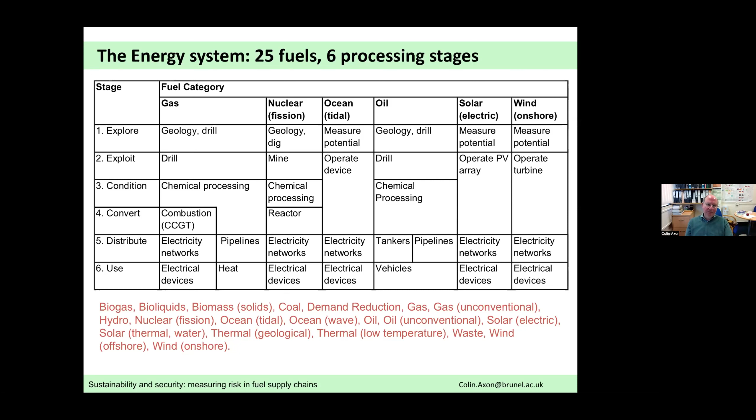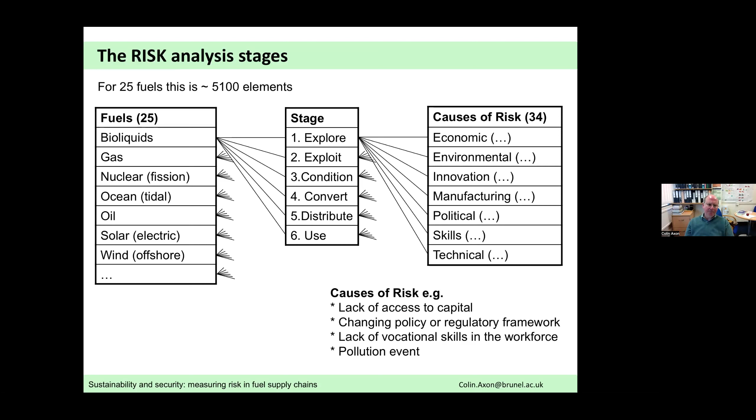So we got 25 fuels in total, each of which have 6 stages, and we identified 34 causes of risk in 7 categories that reflect the whole of the fuel supply chain. That's a big analysis exercise. I'll show you the risk in detail a bit later. We do a standard risk matrix approach using data and knowledge from various sources to assess the likelihood and impact of each of the risks. The numbers in here don't matter. These are just some examples.

What I'd like you to observe, though, is that the seemingly, quote, good renewable sources are not free from high-level risks, although there are lots of low-level risks, and the fossil fuels and nuclear are not solely high-level risks. They have plenty of low-level risks as well.

And this sort of peels back and reveals a set of information which perhaps can be used by policymakers, investors, to target interventions more wisely, or to get more bang for the investment buck or the research buck, rather than having blanket interventions which will work only in parts and be wasted in others. So the point is that the fossils have more high-level risks than the renewables, but it is a mixed picture, and we think that is important to understand.

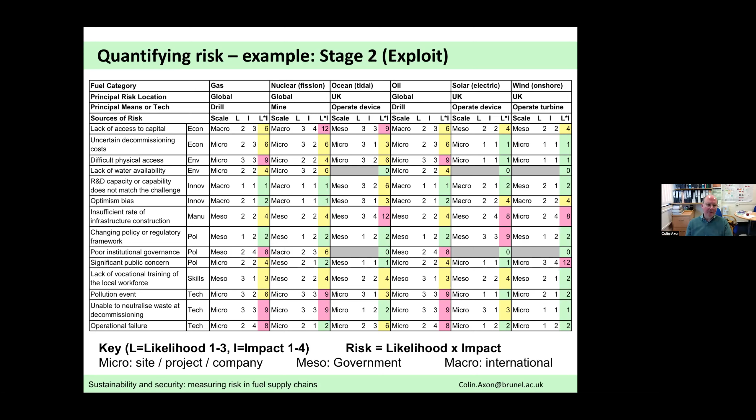So if you do all of the analysis and bring it all together, it won't come as any surprise. I've normalized the risk scores here, and they're not weighted for resource availability, and I'll come back to that. It's not altogether surprising that unconventional gas, shale gas, is at the top. In fact, gas and oil, that is predictable.

Nuclear fission, that's perhaps predictable that it's near the top. However, in terms of risk, it is near the top for different reasons from oil and gas. What might be surprising, and I emphasize this is for the UK, geothermal energy is also very high risk, carries a lot of risk, huge amount of investment essentially, and you drill lots of wells, and you spend an awful lot of money, and you may not get a return on that. The thermal store may simply not be big enough. So there are lots of risks. So that's perhaps surprisingly high.

What is surprisingly high, but entirely justifiable, are the bioenergy routes. So whether that's solid, gas or liquid. And that is, I mean, it's a surprise to a lot of bioenergy researchers, but the fuel sources that are being used, anything from agricultural waste to forestry waste to energy crops perhaps, the variability of the fuel source is really wide. And that makes processing more difficult, more expensive. There might be extra stages.

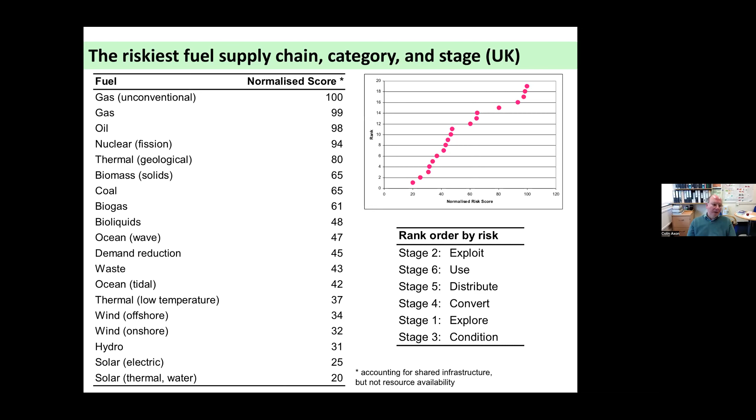These are the causes of risk. We've used a sustainability process analysis type approach to derive these. And then these were evaluated at each stage for each fuel. They have scores. These are in rank order. So most risky at the top, least risky at the bottom. Remember, this is for the UK.

What you'll observe from this is that we contend that our method of analysis is fair and unbiased and reasonable, because you can see that the different categories of risk are spread throughout, from top to bottom. They're well spread, and all of these 7 categories are represented in the top 10 most significant risks. So we think we've got a robust method here.

We tried this out with a workshop with some industry experts, only one academic, and there were people who represented consumer groups as well as generators, investors, and so on. And we asked them not to do any ranking. They didn't see this list at all to start with. We just gave them the list of risks,

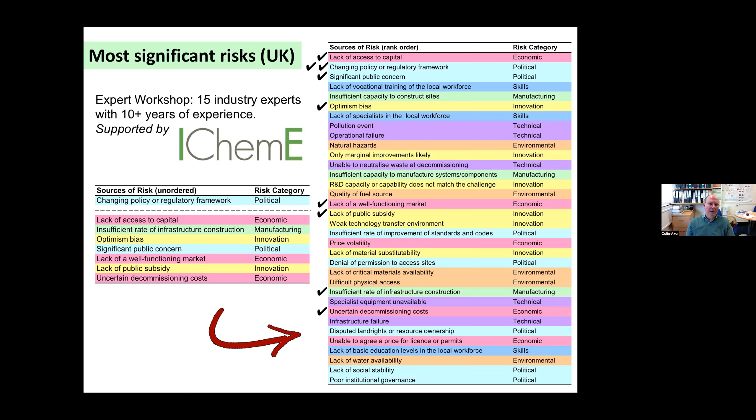And you can see that they recognized the other set of risks, not in rank order, and said these are important, not quite as important as the policy framework, but very important. And as you can see, they were clustered towards the top. It's a relatively small sample, so you read into that what you will, but we thought that was a good validation of what we had come up with. So that's interesting. So what can you do with it?

You'll be familiar with future energy scenarios of various flavors, and every nation has them. I've done this, on the left, for the projected installed electricity generating capacity. Because each of the fuels has a risk score, as you've seen, we can, by proportion, work out how much risk is associated with each of the elements of the portfolio that's projected into the future for each of these scenarios. And therefore, we can calculate the risk profile for that scenario. So this is just installed generating capacity.

CCC is the Climate Change Committee, which advises the UK government, and that's their net zero pathway. The UK national grid, the transmission system operator, has their own scenarios. That's NG, and they've got a reference, and their LTW is essentially a net zero pathway. And there's another set of scenarios from a model called 7see, which is a biophysical energy whole economy model, which I rather like. I'm biased about that, but it's a solid piece of work. And there's a reference scenario and fastest offshore wind and fastest new nuclear build.

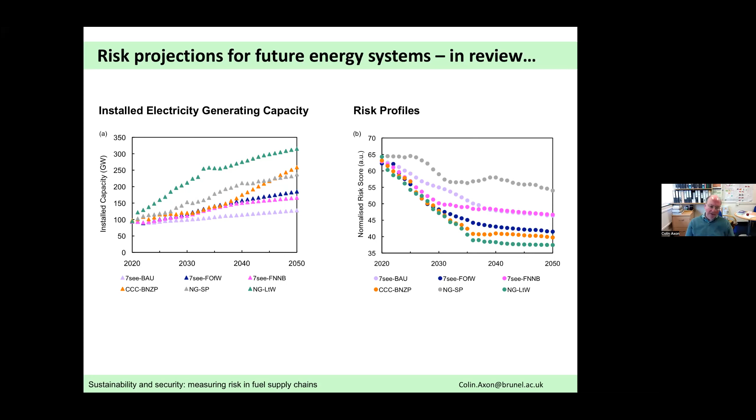Thinking about the greenhouse gas emissions from those scenarios, I've just used National Grid and CCC here. Again, the greenhouse gas emissions profiles out to 2050 are declining, but significantly different for different reasons, because National Grid think that they're going to have to pick up the slack for decarbonising transport and heating, whereas the CCC assume that liquid fuels will be decarbonised. That's why there's a big difference there. But their risk profiles remain similar. I think that's very interesting, and simply looking at the greenhouse gas profiles, you would not be able to predict that. It's another tool for making decisions. This particular work is in review at the moment. Hopefully that will come out.

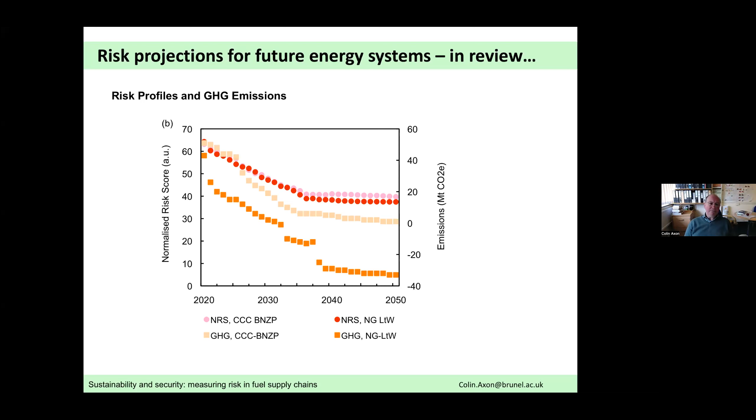So in summary, we have a method which can be applied to the nation state or perhaps a set of nations. It is transparent; you can see that from the papers, we lay it all out. It is repeatable, it's self-consistent, and we put in some checks and balances to minimize the assessment error rate, which I've not told you about, but it's quite neat.

That list of fuels, that rank order, and the rank order of the causes of risk will be different for different countries. The UK is perhaps not that dissimilar from other European nations, but nations in, say, Southeast Asia might have a very different set of profiles from North America or Europe. So it's widely applicable, and we think it's robust. And if anyone would like to collaborate with us in different nations, we're all ears.

We found that the spread of risk, not only between the fuels at any one stage, but throughout all stages, varied. So the risks for a particular fuel are not the same at every stage. And that's, we think, something that's important. We were able to also identify some systemic risks from this as well, which is useful.

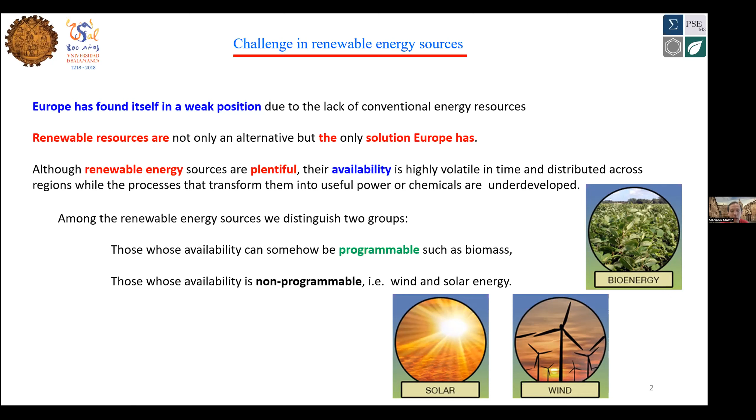What we can actually use is renewable resources, but the problem with them, as most of this audience knows, is availability. There are two different resources: programmable ones such as residues, biomass, waste, or non-programmable ones, solar and wind. Today in Salamanca it is rainy, so even though solar availability is typically high, we cannot rely on it much. However, wind is higher. So the problem is how to manage this availability so that we can maintain our quality of life.

Here in Europe, at least in the south, the solar irradiance is quite large: Italy, Greece, Spain, Portugal. And to the north, we find that the wind velocity is quite large as well. So the idea will be how we can use those resources and deal with the challenge of their availability.

So what we present here is the possibility and the need for a more integrated way to process those resources. And instead of just focusing on the one hand on the process and separately the supply chain of the products, we have to be able to accommodate and to develop a more integrated system that considers altogether the generation, the transformation of the resources, and the supply chain, together with operation and control, because in the end, the variability is what makes the need for such integration of resources over time.

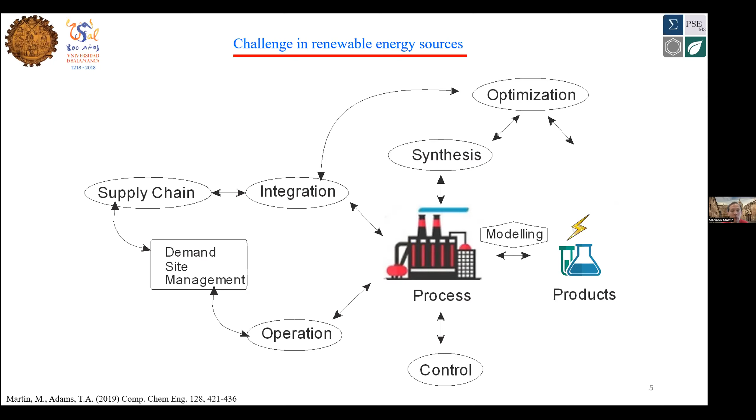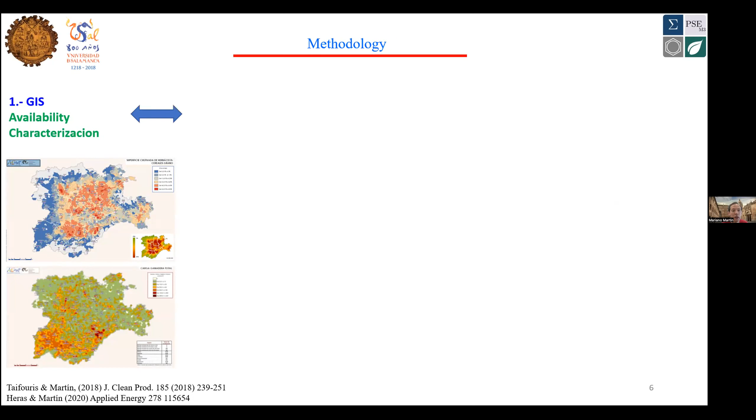So what we present here actually is what the title of the presentation somehow discusses, a multi-scale approach all the way from the evaluation of the availability and characterization of the residues, the resources across different regions, across the different classes of them. Once we have that, and basically we will be using geographical information systems in order to provide some structure of the data to be used for further analysis, we need to evaluate the process.

The process, when we deal with, for instance, different waste, different biomasses, the problem typically is that the different residues behave differently. The pretreatments change, the operating conditions of such pretreatments, as well as the yield. So basically, we have to adjust and evaluate each one of the different residues, each one of the different biomasses, or in the case of wind and solar, we have to consider how the facility will operate under the different conditions across the region of study.

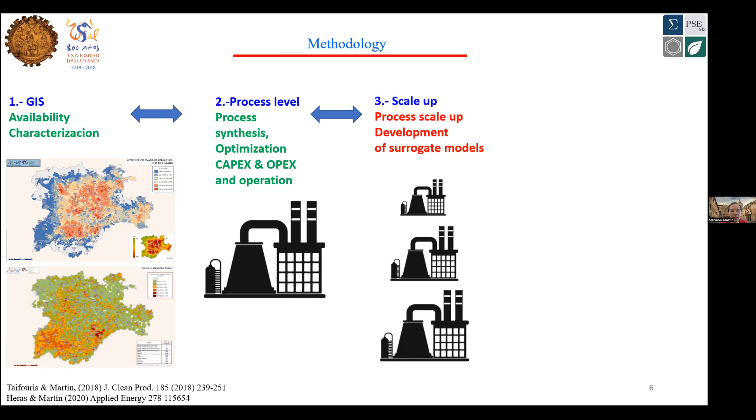For years, chemical engineering has used the concept of economies of scale, basically because larger facilities will not proportionally increase in cost. However, in the case of distributed availability of resources, apart from scale up, we have to also consider scale down. So basically to evaluate the proper size of the facility depending on the availability and the region of study.

And finally, we are going to consider the formulation of what is called a facility location problem, basically in order to be able to select the type of facility, the type of residue, the type of resource, and where to allocate them. One important feature is the fact that we no longer consider only economical indexes or economical objectives, but also environmental and social.

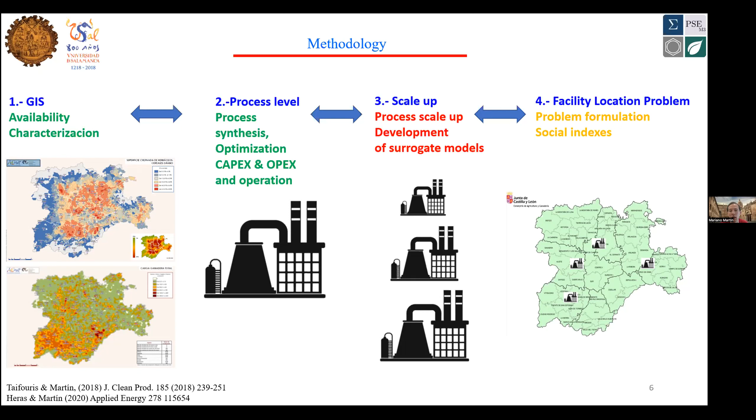In many regions across Europe, and in particular here in my country, in Spain, there is depopulation, basically because people look for jobs in different regions, and as a result, there are what are called empty regions. So the deployment of a new energy system can help mitigate such social problems.

So we've already talked about this multi-scale, but multi-scale means not only process and allocation, but also, as I mentioned before, that we have to be able to analyze the different resources because they affect the yield. So we have to go all the way from the unit analysis, experimental data, first principles models, in order to evaluate the yield from the different resources, and put together a process that will allow us to evaluate the economics and the yield, so that this is the process that is going to be evaluated and installed at some point.

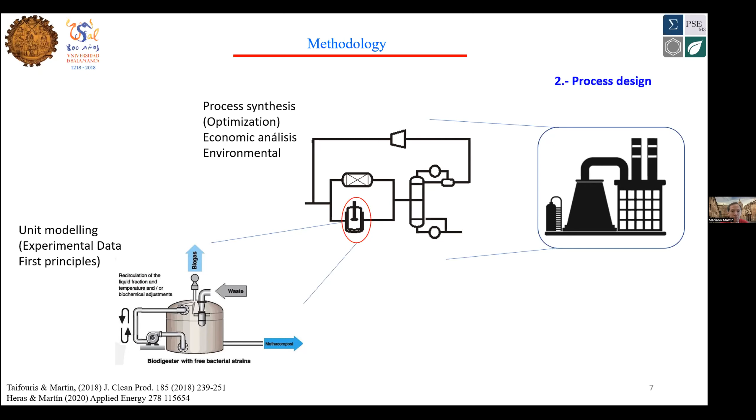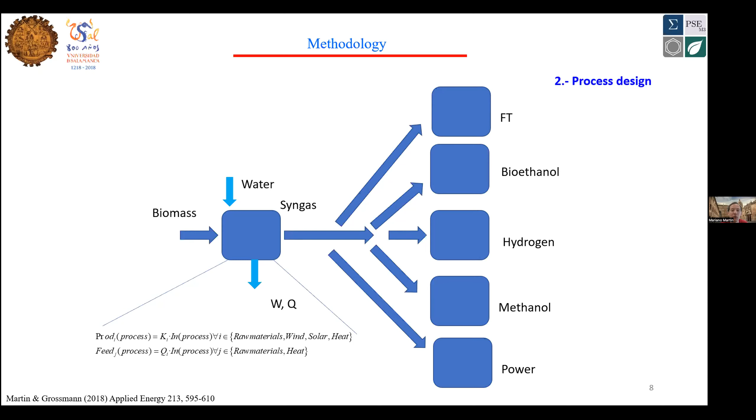One of the particular features of these processes is that sometimes they can be divided into different stages, in the sense that, for instance, with biomass, the syngas we generate can be used for a number of different products. So a facility can process biomass to produce syngas, and later, depending on the allocation and the needs, we can obtain different products and install different facilities as a result.

The third stage, after analyzing the availability and evaluating the process, is the scale up. Typically, we are somehow familiar with certain rules for a quick scale up of the process, but we have to take into account the different units and the different scale up rules for the different units. So this process of scale up or down affects not only the size, but sometimes also the technology.

That means that, for instance, when we are separating air, larger processing capacities will consider distillation, while if we go down to smaller production capacities, we change into different technologies, and that also affects the cost and creates certain discontinuities in the analysis. We have to consider, on the one hand, the OPEX, the operating cost, but also the CAPEX of the facility.

Typically, because of the analysis of these processes, mass and energy flows will allow us to scale up the different units, unit by unit, and it will be possible and easy to scale up the process as a combination of all of them. It is also important to consider water consumption, which somehow has been forgotten for years.

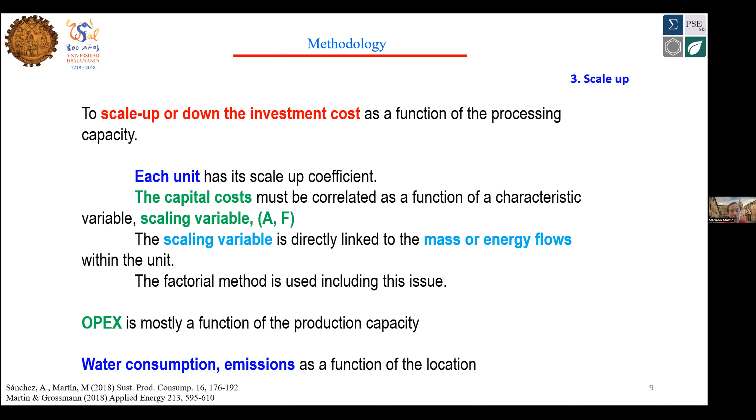Moving on to the last stage, I mentioned already before the consideration of social indexes. Apart from the economics of the system, we develop certain indexes in order to be able to account for the effect that the investment or the installation of new facilities may have on the generation of wealth. The generation of wealth in the form of jobs, and also in attracting people, and so at the same time reduce this movement and the depopulation of certain areas.

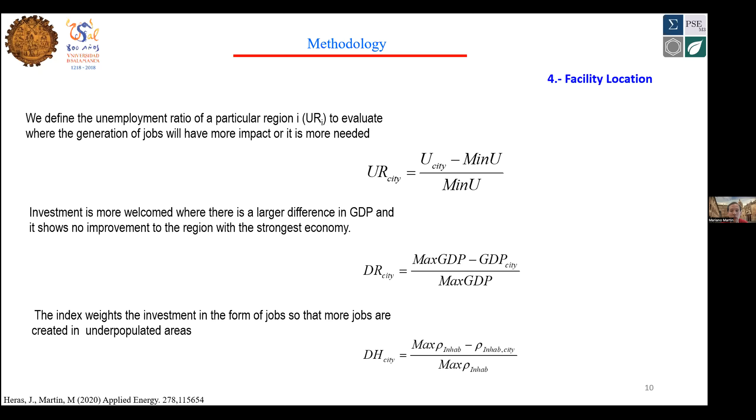Basically, we are going to be developing surrogate models in order to incorporate the facilities' features, their cost, the production capacity, the emissions, the water consumption, etc., as well as social issues, for instance, the jobs generated or the wealth generated. And maybe, in most of the cases, there is a budget limitation that will allow us only to install a number of facilities. So basically, with this method just presented, we are going to go over a number of examples related to the use of residues and solar and wind across different scales, all the way from my region to the country and all the way to Europe.

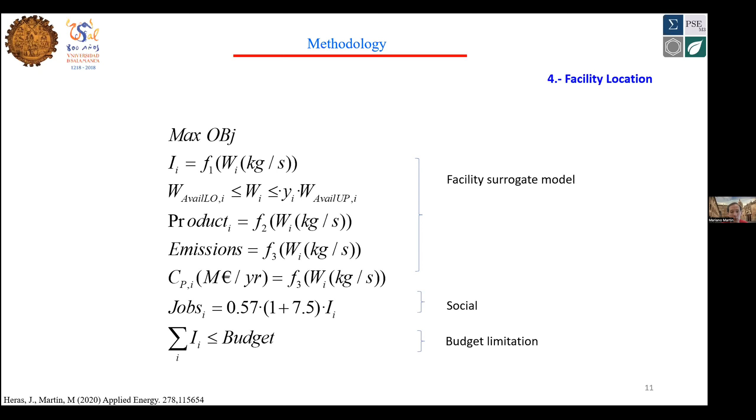So basically, if we pay attention to the management of residues such as manure, municipal solid waste, crop residues, and sludge, it is possible to create a circular economy that will allow us, on the one hand, to substitute part of the chemicals that currently come from crude oil, but also energy, a lot of energy, we will see the results now, and reduce the need for mineral fertilizers. Because of its use in the community, we will still generate some residues that can be recycled as raw material, and also we will be able to continue our activity.

Basically, this process is going to be using a digester. The fact that most of these residues contain a lot of water reduces the possibility of using some other technologies. Drying manure or sludge is typically really energy intensive. So the process is based on collecting these residues, which results in the need for either a supply chain or the selection of the allocation of the facilities close to the ones that generate the waste, the generation of biogas, and the processing of the digestate so that we can recover the fertilizer.

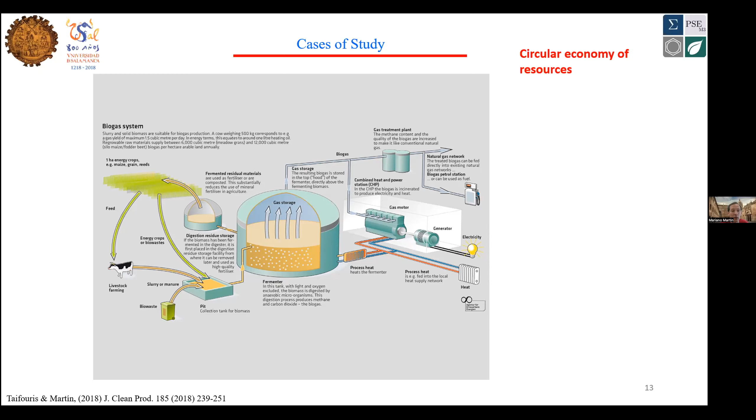Basically, these facilities generate just a little bit of biogas compared to the amount of digestate and the fertilizers. So what it means is that the economics of these facilities is also heavily influenced by the possibility of selling or putting this digestate in the market. So one of the things that we have to also consider is where it's not going to be possible to put our fertilizer in the market. So in this case, we include certain constraints related to the availability of previous regions or previous facilities that already produce or generate this digestate.

So this is my region. Just for your reference, I'm coming from Salamanca, so I'm speaking more or less from here. And if we consider the residues related to municipal solid waste, manure from cows and pigs, sludge from wastewater treatment plants, and lignocellulosic residues, and we use the budget available from the region to install infrastructure, which is 350 million euros a year, we see where and which kind of residue is going to be used to produce biogas.

So basically, we are focusing on municipal solid waste, because there's already an infrastructure that collects the municipal solid waste in large areas, and also lignocellulosic, also because of the density. But one important result from this analysis is that, on the one hand, it is possible to produce 3 times the natural gas consumed in our region just by using the residues. And in order to get to that, we need an investment that is typically between 10 to 12 times the budget available for 1 year. So it is feasible, but there is a barrier to implement this, and that is the cost.

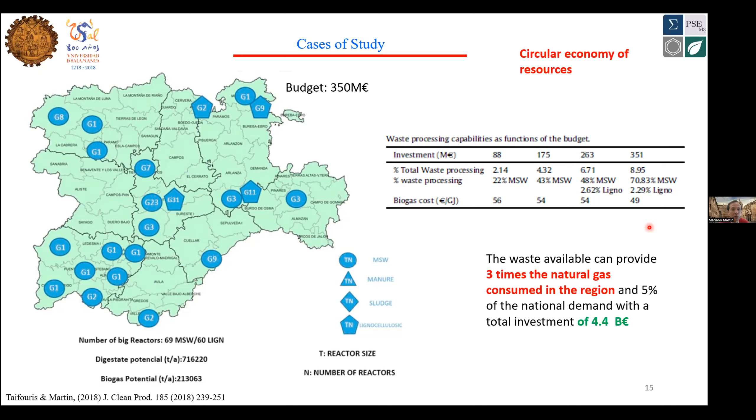Just with the 1 year budget, we can get, as you see there, the processing of 70% of the municipal solid waste, and actually total waste is 9%. So we can produce natural gas, and now we see the actual problem that we are facing, the use of residues can be a problem. However, this is only a region, so we have to move forward to a larger scale.

And as I mentioned before, there is a problem in managing different resources: lignocellulosic, solar, and wind. Here is the case of Spain. We will move on to the entire Europe a little later. We see the availability of wind in different regions, the availability of biomass and residues, and the availability of solar. So we come up with this

superstructure of alternatives so that we can use solar and produce electricity via PV panels and concentrated solar power plants. Actually, there are two different ways to cool them down: wet cooling and air cooling. We have wind turbines, we have residues, we have biodiesel from residues, we have hydro, and we have also biomass.

And there's a way we can store this energy by producing hydrogen and later capturing CO2. We can produce methanol and methane; methane can be used in gas turbines, and the methanol can be used directly for the production of biodiesel. One particular feature is that some of these facilities, for instance biodiesel facilities, require thermal energy, and for them to operate, they need to produce the thermal energy in situ.

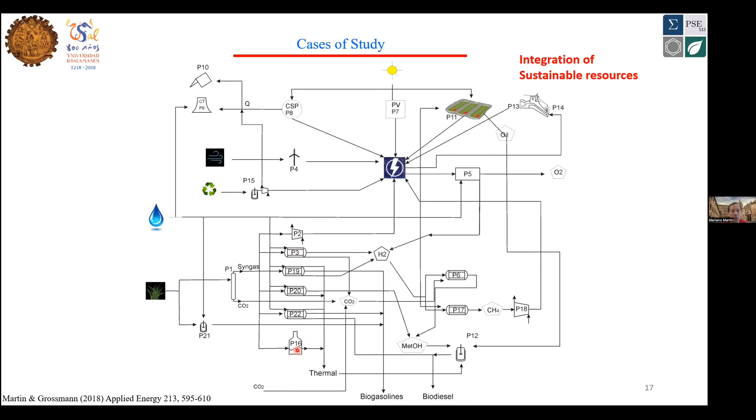So this network is going to be allocated in particular regions across the country. And in the regions where the processes require some energy, it needs to be produced internally, for instance from part of that biomass. If we apply this to the entire country, to Spain, we are able to get to 100% power production with a reasonable use of area. It is not possible to go over 20% of fuels, diesel and gasoline production.

This means two things, and we relate this result to some of the comments my colleague just made a few minutes ago. Actually, saving energy is one of the important ways. It is true that it's difficult to convince, but we have to be careful because we are using more fuel, more gasoline and diesel, than we can actually produce easily.

We can also see the reliance on hydro. Hydro energy is recommended in most of the places, even though we have to be aware that in some cases it's already available, and in others the geographical area will not allow us to build such a facility. So a more detailed study can be used for this, and also again the investment typically is quite high.

So again, this is on a monthly basis, but we also did some studies on how to integrate solar and wind from a scheduling point of view, so that we will be able to organize the use of the different resources in order to make it work. Another problem related to the current situation is that over the last years, coal or thermal power plants have been shut down in Spain. Nuclear facilities are reaching their final years. They are getting old, and we have to substitute a certain amount.

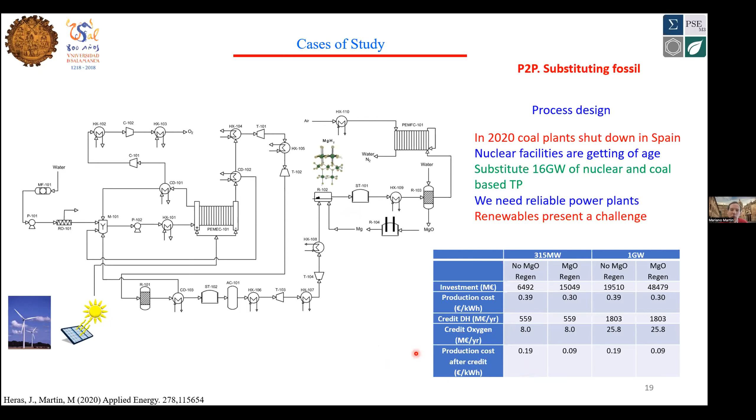And the second thing is the cost. If we look at the cost of the energy, with the current prices of electricity, these facilities start to be promising. So we have to realize that it can be feasible, but again, who is going to invest in these facilities that are the size of nuclear plants? So that's the main issue behind.

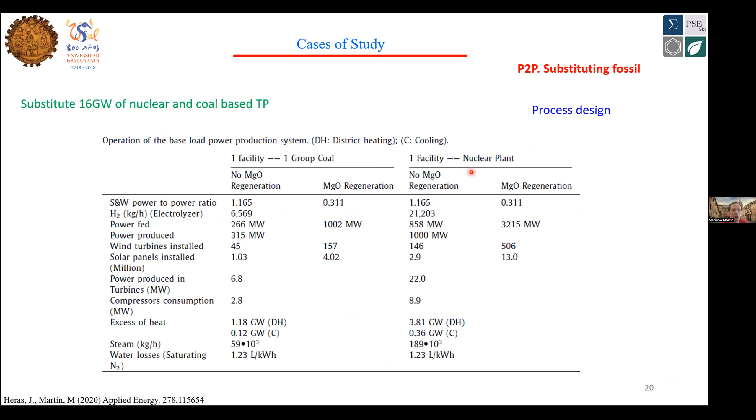Over the next year, it is expected that with the improvement in the efficiency of electrolyzers, fuel cells, PV panels, and wind turbines, it is possible to reduce the electricity cost produced by these facilities and make it more competitive as well. These facilities can be used to substitute those who, for many years, have been providing the base load for

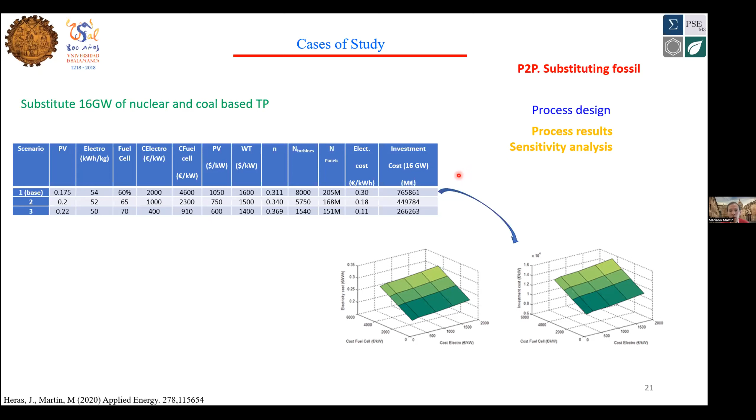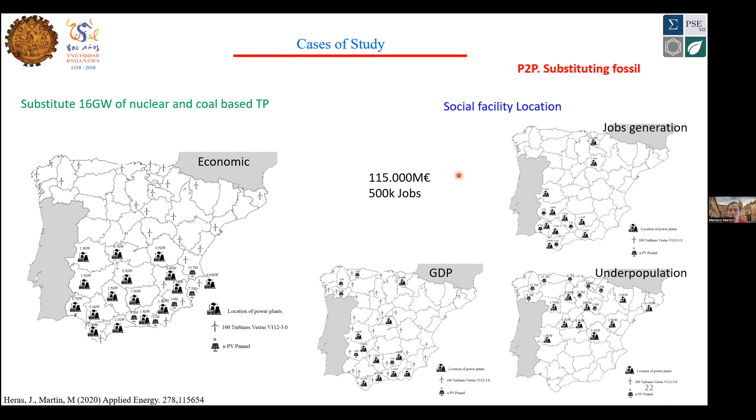But again, the barrier is the investment, because these facilities are expensive, but they are not much more expensive than the nuclear or the coal-based power plants that were installed at some point. Instead of this, the hydrogen economy is also moving into, for instance, the production of different non-carbon fuels, such as ammonia. Ammonia can be produced from solar and wind, basically producing hydrogen and separating the air using power, basically is what you need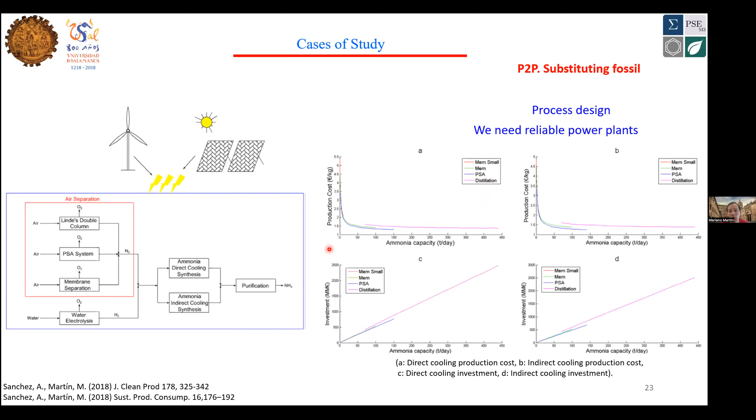for those. And you see that depending on the size of the facility, we have different technologies for the separation of air, from distillation for typically larger production capacities to membranes in case of lower. You see the production cost of the nitrogen and also in the end of ammonia as a result of the production capacity of those. Once you have the ammonia, we can develop a power plant based on ammonia.

Nowadays, it is important to have a mixture of hydrogen and ammonia for it to be possible to be used in a gas turbine. That's the reason why the ammonia is to be partially decomposed to generate the hydrogen required for that combustion. And among the different alternatives, whether we have to treat or not the gases, whether we recover the hydrogen that has not reacted or not, and whether we recover the argon that is going to be used to control the temperature in the turbine.

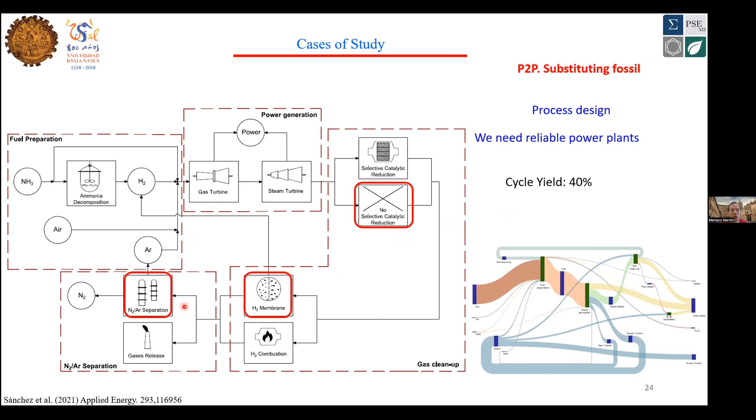Actually, we have 8 different alternatives, and the one with the cycle yield that is around 40%, which is again competitive with the current power plants, is the one that doesn't require to treat the gases. We recover the hydrogen and we recover the argon instead of producing more argon from air. Again, the production capacity plays a role, at least in terms of production cost, but the production cost of electricity, we will see a little bit on the effect of the ammonia on that, but it is still high.

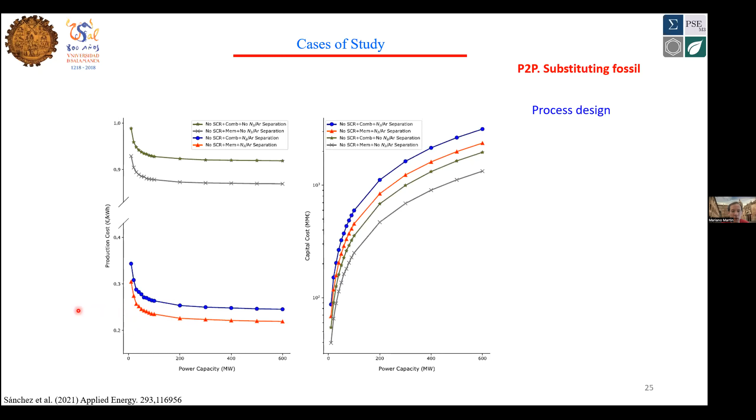But over the last summer, we've seen costs of electricity that were even larger than the ones you see on this slide. Again, this relies on the cost of ammonia, and we see this sensitivity analysis with the effect of the cost of ammonia on the production cost of electricity. We see again the effect of the power capacity. For larger production capacities, as long as we get ammonia prices below 0.4 euros per kilo, the electricity costs are competitive with the values you see nowadays in the market. So these facilities can also help.

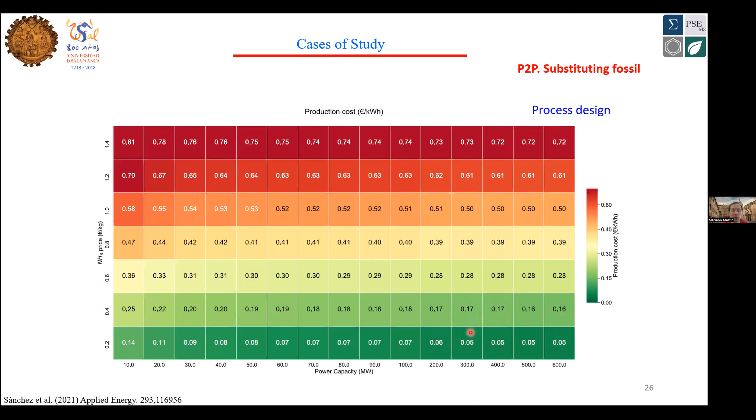And finally, this is a work in collaboration with Professor Kravanja's group at the University of Maribor, and we extended the work into full Europe. And the idea will be to evaluate the transition all the way to 2050 from the status in 2020 and see what we can do. So considering again economic, environmental, and social issues.

Even though this is not intended to be a seminar for specialized people, the problem is actually really large. We are talking about millions of variables and millions of equations, but it is possible to help provide ideas on how to get to that 2050 100% renewable power and 50% gasoline and diesel. Actually, the limitation again is how much fuels we can get from them.

So basically, you see how solar and wind are installed over time. We make use of the availability of the resources across countries and across the different regions. In terms of the production of gasoline, the availability of biomass in Central Europe is key for the production of that, as well as in the north, and production of diesel basically from residues, as you see in highly densely populated areas, is where that biodiesel is produced.

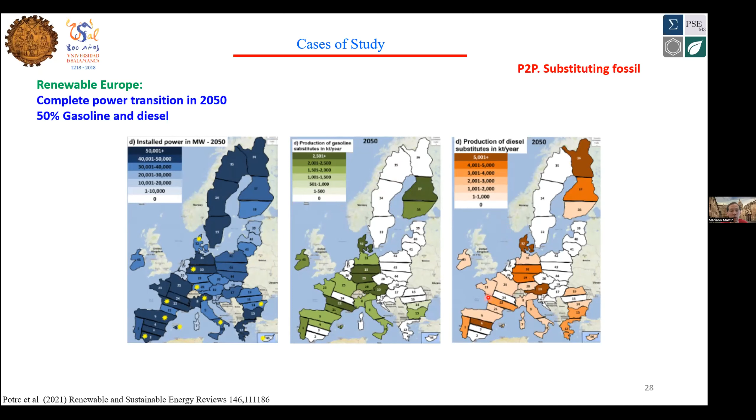And one final comment: it is possible to evaluate the problem from a country level, which means each country more or less helps itself, or on a more integrated area, and that's the reason for the European countries to come to agreement. We see that if we deal with the problem from a united point of view, we realize that the cost, the economic, the environmental, and the social

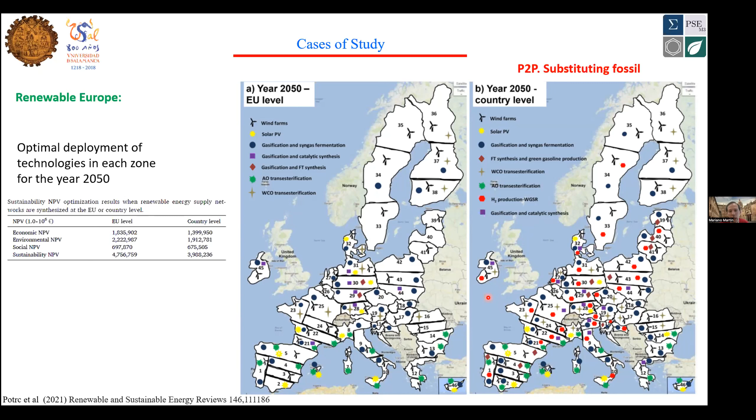objectives are better in case of considering a larger area, basically because we make better use of the resources across regions and across the territory. If you go to a country level, you are more restricted to the availability in the different regions, and as a result, the costs are higher and the sustainability is a little lower.

So with this, I'd like to conclude by commenting that energy security in Europe is key for our future, and we can go sustainable. It is going to be difficult, first because of the barriers related to the investment, but the tools that we are creating from the process systems engineering field, as well as from chemical engineering in general, can help in that transition.

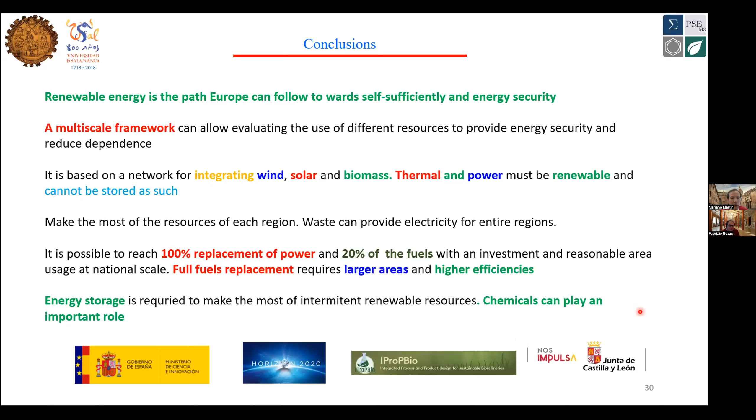It is possible to somehow replace the power production as of the demand of today, but it's difficult to get to larger substitution of fuels, basically because of the large consumption so far. Energy storage is an opportunity. We as chemical engineers can help, because chemicals, catalysis, and so on will help develop such facilities. But in the end, the advantage of our work is that we can evaluate the alternatives and come up with solutions.

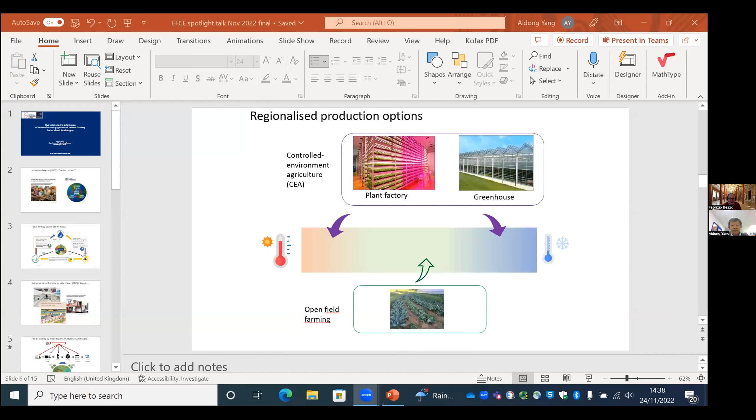Aidong is a chemical engineer, mathematical modeler, and he has been working, let's say, in the wide area of process systems engineering, specifically focusing, especially more recently, on the modeling, optimization, and also the sustainability analysis of food, energy, water nexus, and also on the technologies and designs for CO2 removal from atmosphere and the industrial decarbonization.

Today, Aidong will talk about some studies they carried out on understanding, in fact, the food, energy, land coupling within the context of localized food production with indoor farming. So, Aidong, the floor is yours.

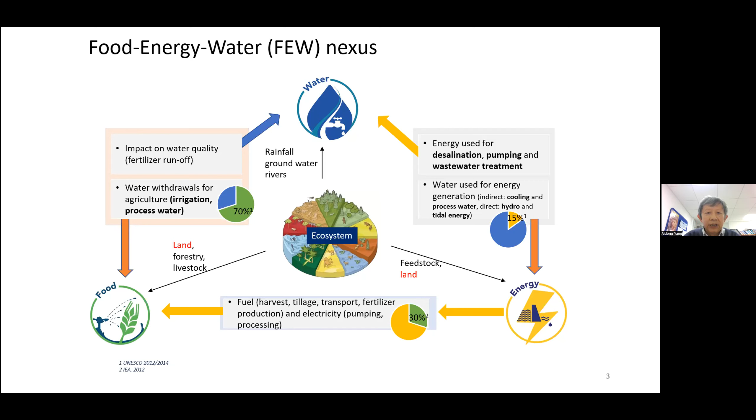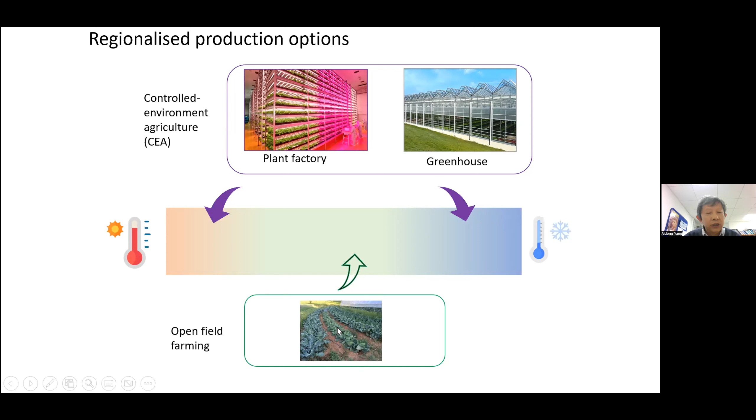So we want to understand, across different regions, to what extent controlled environment agriculture possibilities like plant factory or greenhouse can contribute to the increased production of food as an option to open field farming. Now, to look at this, we thought there are a few questions we need to answer. The first one is on the energy demand. So you can see the connection between food and energy. This is particularly relevant to greenhouses and plant factories. We will see later on, this can be rather energy demanding. And we need to understand, in different regions with different climates, what the energy demand would look like, because that would be a great contributor to the economic feasibility.

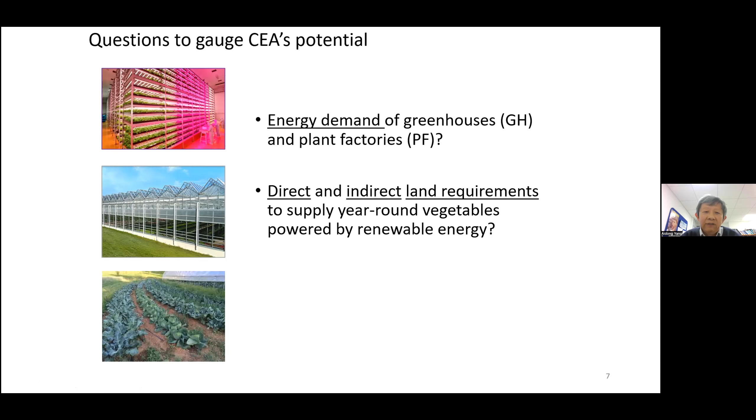And then we have an issue around the land requirement, because there are a number of commercial developments around controlled environment agriculture or indoor farming, and from these developments, sometimes we hear the claim that indoor farming, among other possible benefits, would save land because the per area yield would be much greater than open field farming. I think this is true just in terms of the growth. But on the other hand, if we take into account the need for energy supply, and particularly if we want to supply the energy from renewable resources such as wind and solar, the energy supply side may require a lot of land. So to really answer the question of how the different options compare from the land perspective, we need to calculate both direct, which is for growth, and indirect, which is for energy. We need to combine direct and indirect land requirements so that we can have a more complete assessment.

And finally, still around the land issue, after we have quantified the land requirements for each option, we need to look at different regions and compare that with the local land availability, because one option which might be suitable for one region where land is plenty might not be suitable for another region where land supply is rather stressed. So that is another thing we said we wanted to look at.

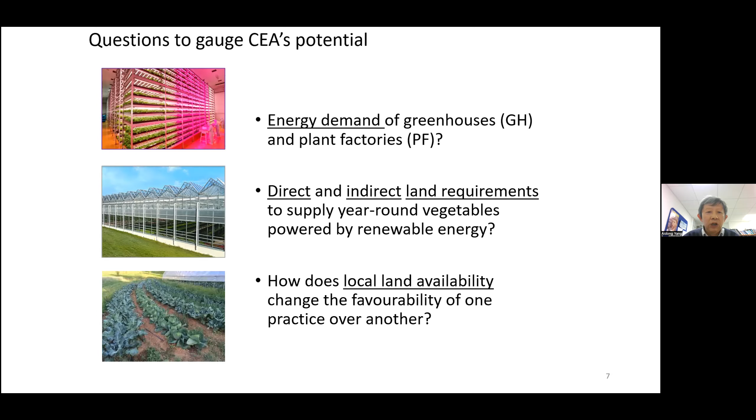So how do we answer these questions? Well, again, we have done some modeling exercise. So we modeled the plant factory system and also the greenhouse systems. These things are not what chemical engineers often model, but actually, if you look into these systems, they are rather familiar to chemical engineering. So we have a large air handling system involving cooling, heating, and refrigeration.

Within the growth space, we need to model, say, the plant growth, which is not quite common for chemical engineering, but we do have the temperature regulation, humidity regulation, and also the light supply, which are very much engineering. So I'm not showing the details of mathematical models, but we had to model each of these two different CEA types. And beyond the modeling, we also need to optimize each of them because these are the two options. Now, in order to draw a fair comparison, we have to optimize each of them so that we compare them on their optimum forms so that the comparison can be fair.

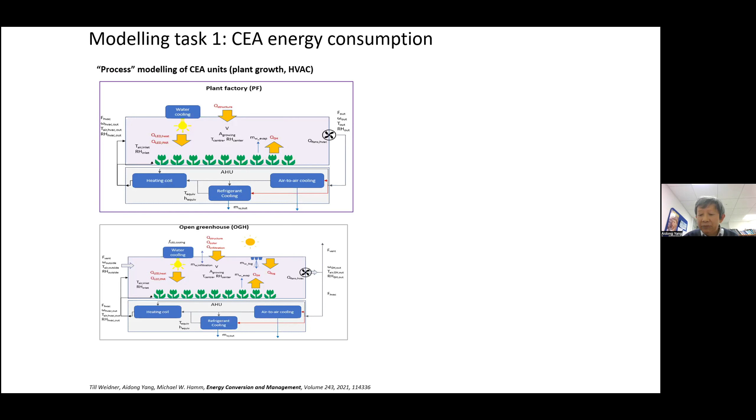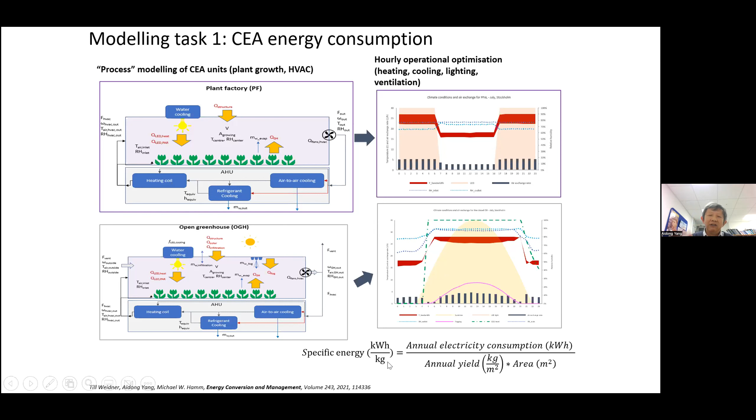So I don't think we have time to look at all the details, but very quickly, this picture is for a plant factory. So this area and this area represent the use of artificial lighting, and these bars here show the intensity of ventilation. And this is for greenhouses, it's very similar. So the target of optimization is to operate the system within the required temperature and humidity ranges so that we can minimize the specific energy consumption, which is, to produce 1 kilogram of vegetables, how much energy we have to consume. We want to minimize the energy consumption. So that is the first modeling task.

The second modeling task is to look at land use analysis. So for open field, it's more straightforward. We just need to get the yield figure for different regions of our interest. For the CEA, we needed to look at, I think this is similar to what Mariano was talking about, for each region and for each demand profile, the land requirement if we try to supply the energy from, say, solar PV or from wind turbines. And this is to quantify the absolute land requirement.

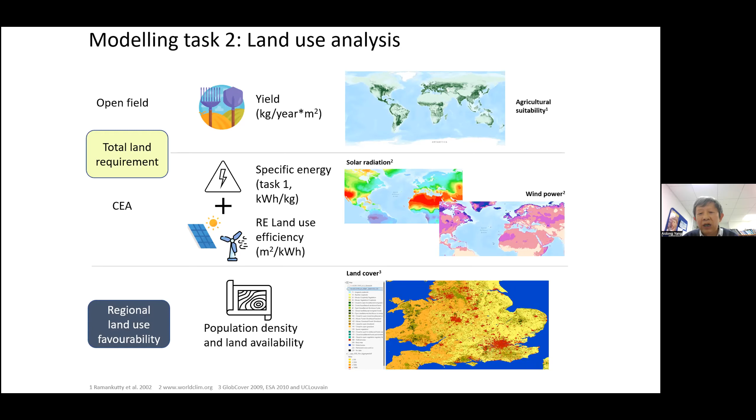And as I said earlier, then we need to embed these into the local land availability. So for that purpose, we needed to understand for each region of interest how much land is available for renewable energy generation and how much land is available for agriculture. So these are the modeling tasks. And in terms of the scope of the work, if you're wondering what kind of things we think we're going to grow, we designed a basket of vegetables. So this is mainly about vegetables, not carbohydrates. And the target is to supply 50% of recommended nutrient intake for every region that we have modeled.

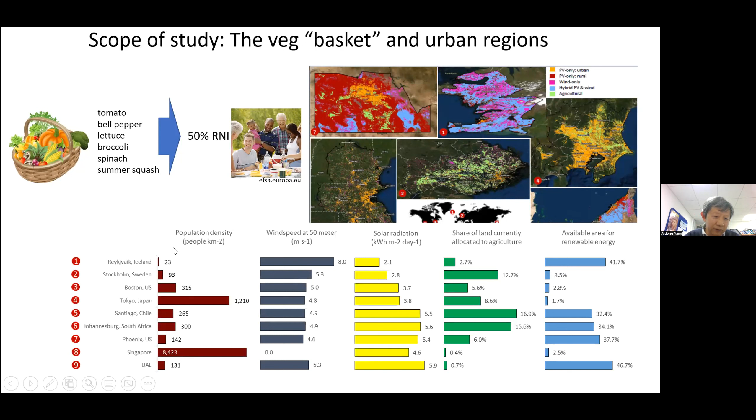And what regions? Well, we modeled across the world. We chose 9 urban regions. This covers different continents and different climate conditions, population densities, and also land availability. We have got a couple of regions in the rather cold areas and a few in the hot areas like Singapore and UAE, and a few in between. So this is the range.

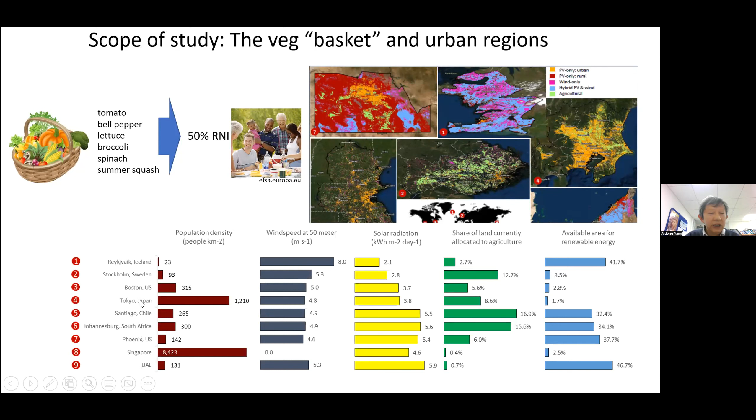Now, just a little bit on the results. So on the energy requirements, for the 9 regions, we have calculated the average plant factory energy consumption and greenhouse energy consumption per kilogram of vegetables. And you can see that plant factories are certainly much more energy intensive. A greenhouse is better. For greenhouses in the very cold and very hot regions, the energy consumption is a bit high, as expected. For the other regions, they are much more energy efficient compared to the plant factory.

We also calculated for each area: if we try to supply 50% of the RNI for that region, how much of the currently produced energy in that region will have to be used just to support CEA, to support plant factories or greenhouses. You can see quite a significant percentage. I think for greenhouses, it looks reasonable or acceptable for most of the regions, but for plant factories, the percentage can be very, very high. So that points to the feasibility of energy supply in a very much upscaled CEA sector.

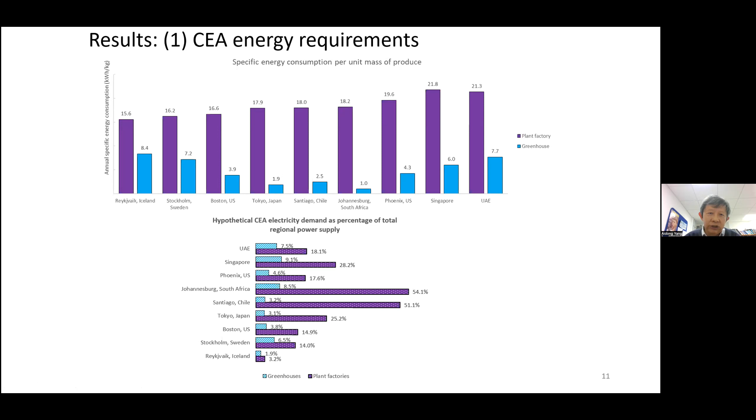We talk about land use. So here we show the combined land use across different regions. So for every region we have 3 bars, one for the open farming, then one for greenhouse, and another one for the plant factory. So this is a combination of the land required for growth and land required for energy generation. The energy generation can come from wind and from solar.

There are some details. I think I'm going to skip these details, but in terms of comparison, we can see a few things. So first of all, if we consider the combined land use, the indoor farming is not necessarily saving land. So in areas like Stockholm in Sweden, for example, and also in areas like Chile, it looks like the CEA would consume more land than the open field farming.

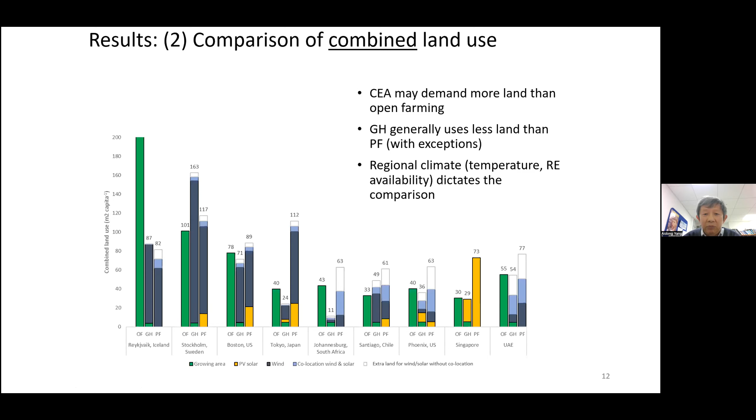In a number of areas, the indoor farming can save land, particularly with the greenhouse option. But for many other areas, particularly the plant factory option is not really favorable in terms of land use. And finally, just to show a little bit on the analysis of the land requirement against the local or regional land availability. So this picture looks quite complex, but let me go through this very quickly. Sorry.

We have different colors showing different regions. The solid circle is for plant factory. The dashed circle is for greenhouse. And on this x-axis, we show how much land we can save for growth if we replace open farming with indoor farming relative to the total land available for open farming.

So that is the x-axis. On this direction, we show the renewable energy land abundance. That means the total land available for renewable energy generation versus the renewable energy land required for just supporting CEA. So you can see some of the regions would enjoy a lot of land available for renewable energy generation, which is okay. But on the other hand, we want to look at to what extent we can save land for growth.

Along this direction, you will see the most favorable locations. That means they have got a lot of renewable energy land available, and by implementing CEA, we can save quite some land from the agricultural operations. Well, unfortunately, not many countries are of this category. I think only this is UAE here, and this is Iceland here. For all the other countries, either you're not going to save a lot of land for growing, or you do not have enough land for renewable energy.

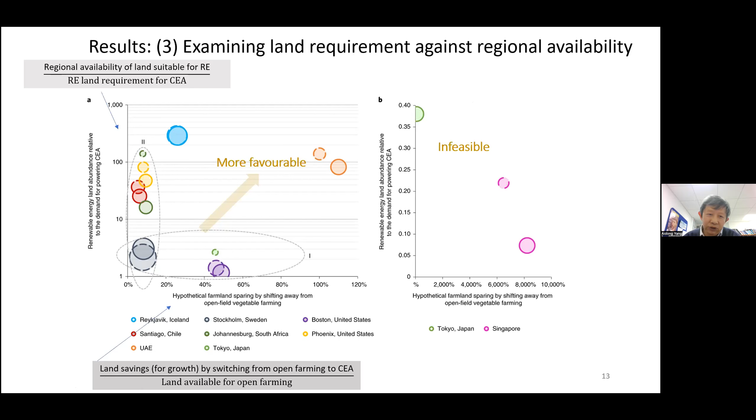Okay, so quickly, let me wrap up my talk. So we're looking at the potential of CEA, greenhouse versus plant factory. You can see that greenhouse might be better than a plant factory, but there seems to be a kind of tension between the resilience perspective and the sustainability perspective, because with the use of CEA, we might be able to shorten the supply chain, but on the other hand, for sustainability, we do need to find enough land to produce renewable energy, which is not always possible.

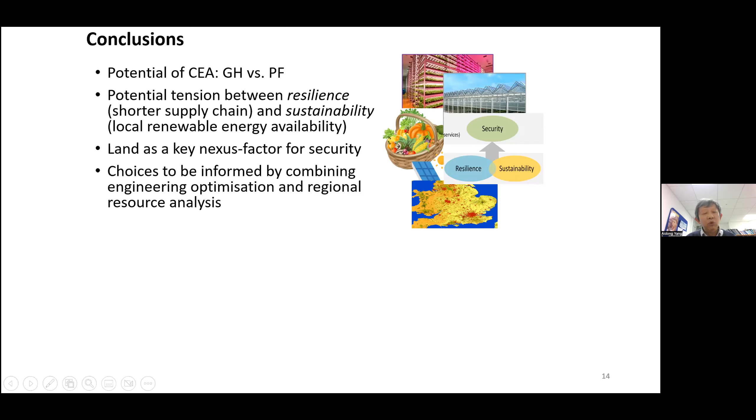And we were able to come to these kind of conclusions by combining engineering optimization and regional resource analysis, which seems to be quite important for answering questions of this kind.

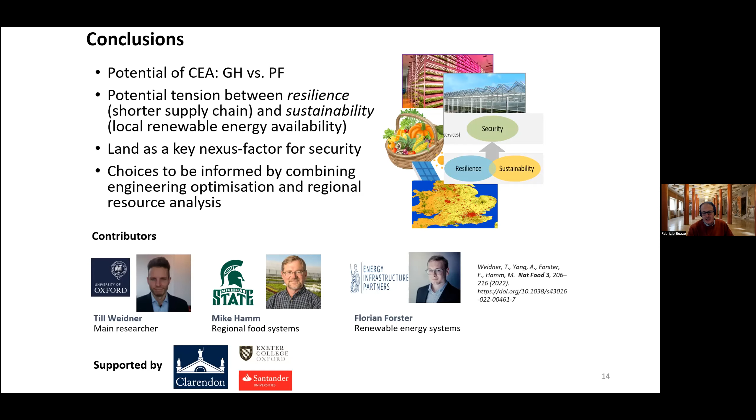Okay, thank you. I don't see any questions, but before we close, let me maybe just ask one question to everyone as a sort of final discussion. What we saw today are tools, methods, models for making choices, we may say. So, for instance, Colin discussed tools and metrics to analyze and assess security in energy. Mariano presented several examples of models that can be used to define, in a way, the best configuration. So again, the best choices we can make to set up an infrastructure.

And Aidong did something similar in a way for a specific problem that was about localized farming, considering energy and so on, and to provide an analysis and again tools and metrics to decide what can be done and what is best. What about constraints, in a very broad understanding, in my opinion? So we provide, let's say, tools and metrics. We say this could be the right choices. What do you see as general constraints we may have for an actual implementation?